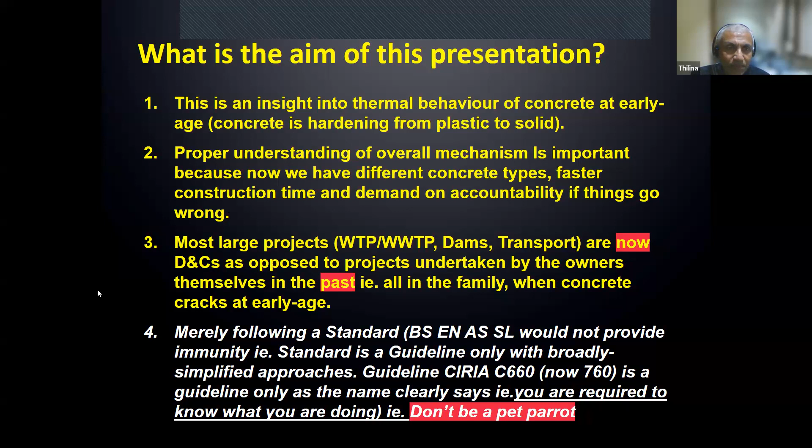My background very quickly: I did my PhD in structural engineering on temperature-induced stresses in concrete storage tanks, and of course on bridges. Then I was lucky to get an industrial fellowship from the Japanese Academy of Science to work in Hokkaido, the most northern island in Japan, very cold, working with contractors and consultants for 2 years.

Mainly the heat of hydration and seismic liquefaction. Then I worked on a few committees, AS3735 and New Zealand 3106. They're both water retaining structures codes, which take thermal effects very seriously compared with European standards, which just use a nominal reinforcement amount. And 3600, that's a concrete code, plus the Australian National Committee on Large Dams Concrete Dams Technical Committee, and the Japanese Concrete Society on heat of hydration, as part of rewriting design and construction specifications.

In my career, I have seen good and bad projects. One thing is, when people think heat of hydration, they think of 10-meter thick walls. Now, heat of hydration affects thin members as well. The bad one is, sometimes I still get nightmares witnessing a client or consultant writing a blank check for a contractor, where at current prices that would be about Australian dollar 1.5 billion, where some thin members had cracks going right through the thickness, and this is inaccessible over 120 years once we've built it.

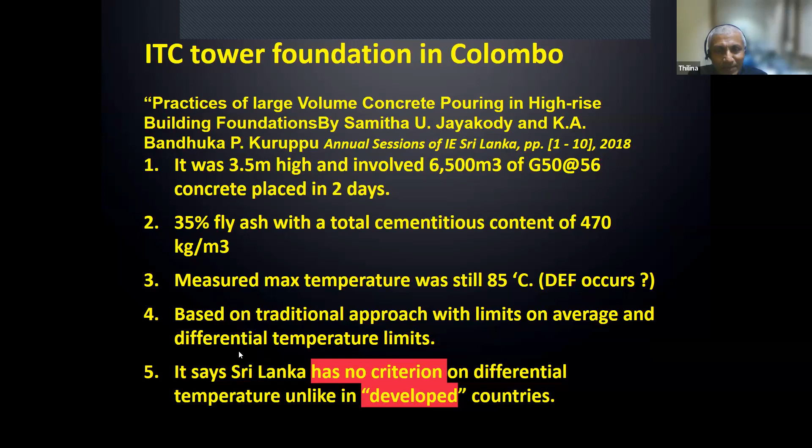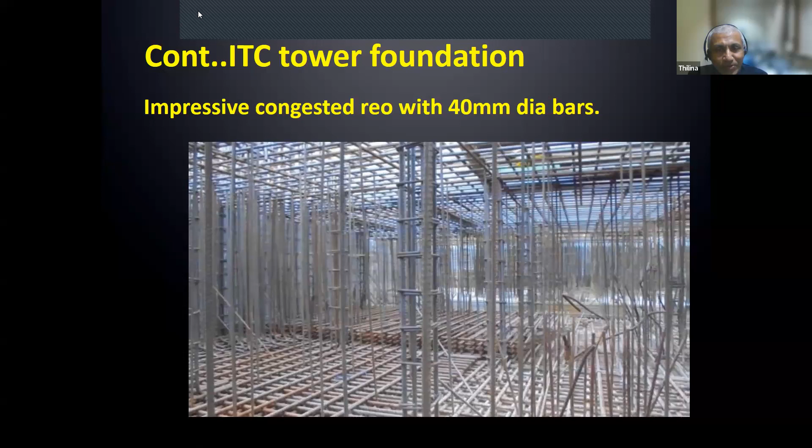Now, his reference to developed countries - I think developed countries get that wrong too. I have seen this both around the world and here. So no point doing things in Colombo saying, oh, developed countries have guidelines, so we do this, because developed countries get it wrong as well. That's what I'm getting at sometimes.

I have seen developed countries build a 400mm thick wall in a desal, probably costing 1.5 billion in today's value, due to wrong generic spec - maximum cement, 25 degrees, poor specs basically parroted from somebody else, inexperienced, probably never seen wet concrete, wrote the specs. The contractor poured that 400mm thick wall, designed to CIRIA C660. You can see the crack - I can basically put a ballpoint pen through it. So I just showed you developed countries won't get heat of hydration correct either.

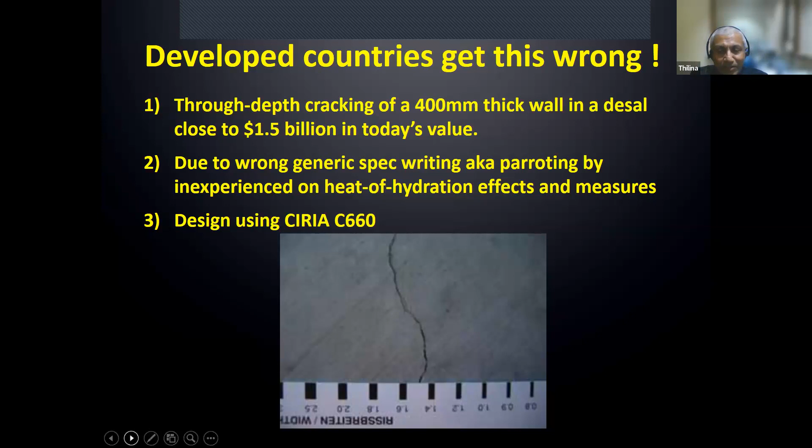Let's go to the next one, please.

So some argue, even with cracking, that cracking doesn't accelerate corrosion, so don't worry about the crack at 0.3 or 0.2mm. Let's put the desalination or bridge project aside - if you got a bathroom and got cracks you could see, you wouldn't accept that, you'd ask the builder to redo it. So why argue that on big projects we shouldn't worry about 0.2 or 0.3?

So I just don't rely on people trying to sell you snake oil saying don't worry about the crack width. If you write this spec, crack width at the 95th percentile should be less than 0.2 - that's what it should be.

After cracking, I have seen contractors whose specification for the crack repair is thicker than the design report, because they expect poor concrete to crack. They take truckloads of epoxy and start grouting. I have seen 550 pages of crack repair documentation, when the design itself was only over 30 pages.

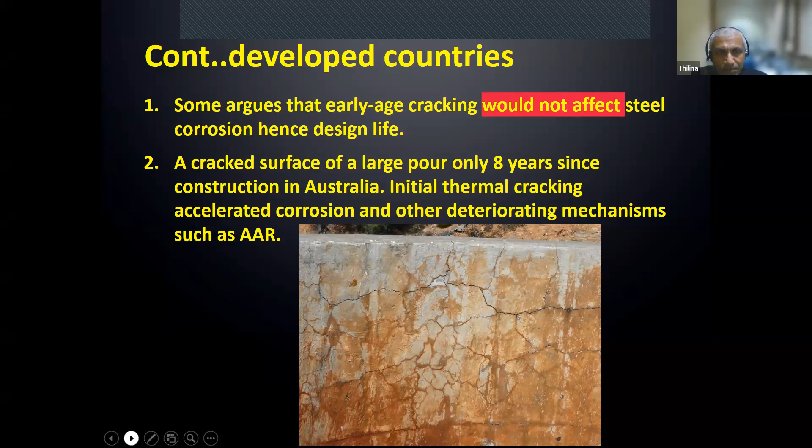Now, rather than jumping into heat of hydration, I'll show two types of thermal stresses. One is ambient, on hardened concrete - if you got a car park, it will get heated, that's due to solar radiation and ambient temperature. The second one is heat of hydration, which is related to thermal and durability issues very early on.

There are standards like American Concrete Institute Committee 217 - very good references, used by the US Army and USBR Bureau of Reclamation to build a lot of dams, so they have a lot of experience. Then there's the Japanese standard for RCC, with an English version - CIRIA C660. For ambient, you have two water retaining structure standards, 3735 and 3106, and ACI American Concrete Institute 318.

I suggest especially the Sri Lankan audience and others, if involved in water retaining structures, look at 3735 and 3106 - temperature effects are very comprehensive there. Next one, please.

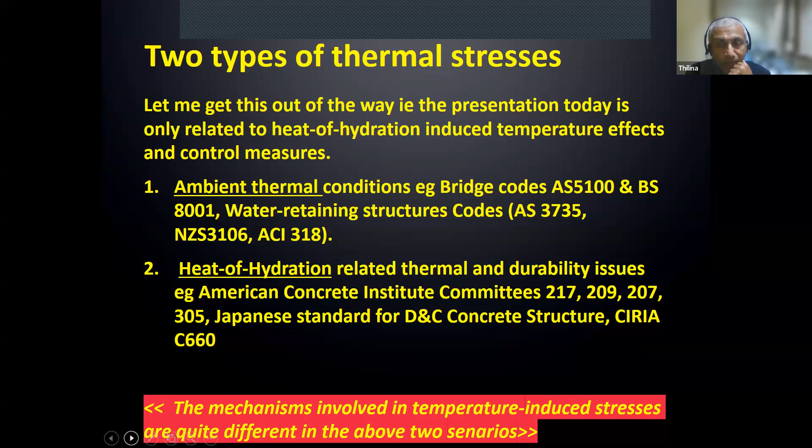Now, ambient thermal effects happen in hardened concrete. Of course wet concrete will be subject to ambient too, but formwork will mostly cover it. Over the years, if you take ambient temperature effects, they normally govern all the loading conditions - 30, 40 years ago, they were not in any standards.

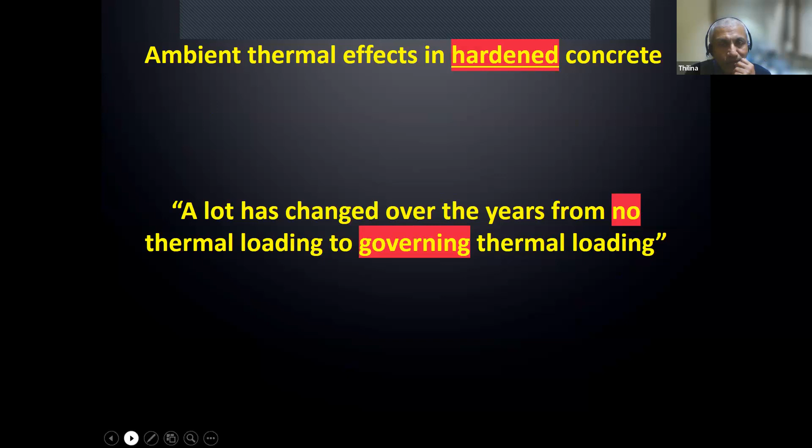This is how ambient temperature gradients, ambient condition induced temperature gradients, occur on bridge decks. If you look at 1969, it's uniform, but now it's a fifth order parabola. I did some work with the late Professor Nigel Priestley at University of Canterbury on this fifth order parabola - throughout the world they use the left one, now it's the parabola, done in New Zealand. So you can see it changes from uniform to fifth order parabola. Let's go to the next one, please.

From that diagram, 1969 uniform was 20 degrees - if it's a bridge deck, it expands uniformly, and if it's on bearing, it's stress-free, no stresses at all, because it's axially unrestrained. But post-1977, there's a fifth order nonlinear parabolic thermal gradient - this one, even if unrestrained, gives us primary or residual stresses.

And if it is restrained, we get secondary flexural stresses - you had heard sometime what I said, primary residual. Most engineers, when they use software - I won't name the brands - sometimes don't even know what residual stress is, but they run MIDAS and everything, sometimes with no clue. So the best thing is to get a pen and pencil and do hand calcs. I don't have time to put that slide today, but you have to be very careful when you get a nonlinear gradient. Next one, please.

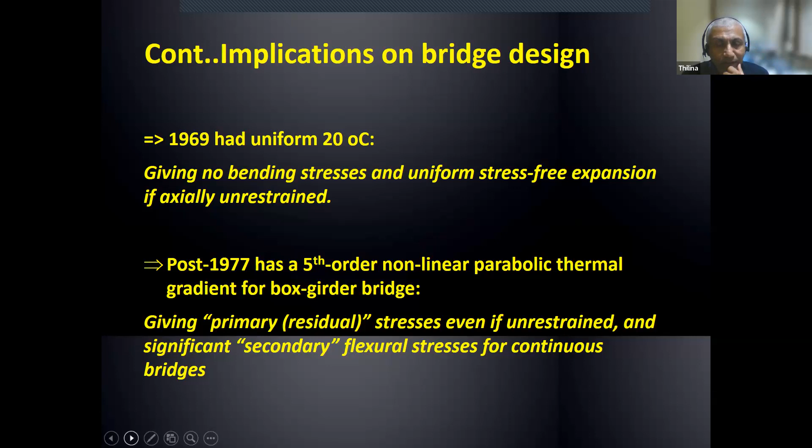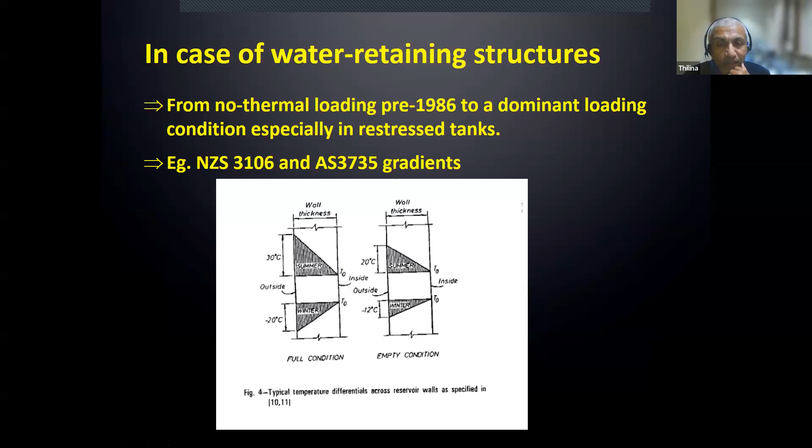So in case of water retaining structures under ambient conditions, pre-1986 codes didn't mention this at all. Now both Australian and New Zealand standards say if the tank is full under solar radiation, we get a 30 degree temperature rise externally, and if it is in winter, we get a 20 degree drop. Once you do the calculations, you can see this dominates the hydrostatic induced loadings.

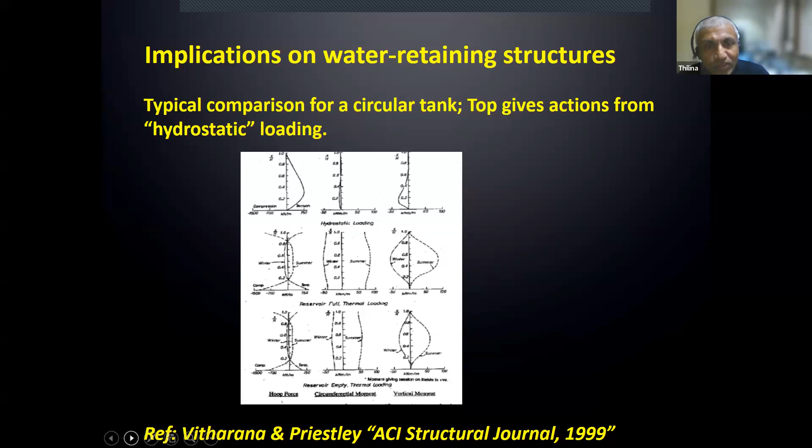I just put this as a quick example on the water tank. I published this paper in ACI Structural Journal in 1999. The top one is the hydrostatic loading, bending moment, hoop force, circumferential moment, and vertical moment. The middle one and the bottom are the thermal stresses. It's not time to read the numbers, but you can see the difference when it comes to circumferential effects - zero on the hydrostatic, but thermal effects dominate.

So that's some reason why a lot of tanks in Australia and New Zealand started cracking. That's the reason they looked at what happens post-cracking and found it is the thermal stresses.

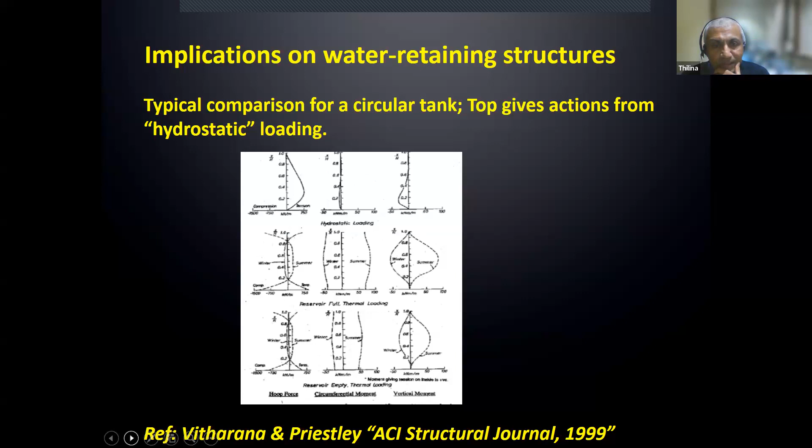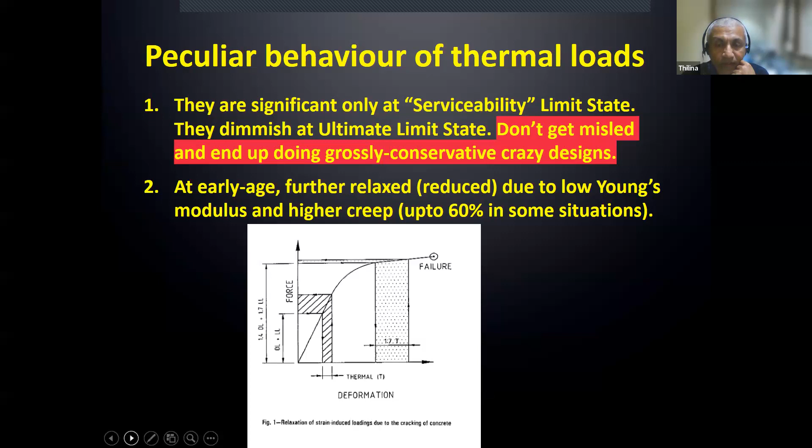And at early age, concrete, one other thing comes into picture - I'll put it in the slides later. Early age concrete creeps, it's a semi-solid, it creeps a lot. So if you calculate using elastic theory, when you include creep effects, the elastic calculated value will be reduced by up to 60%. That's one reason some people tend to overestimate heat of hydration effects.

Ambient versus hydration-induced thermal stresses. As I said earlier, under ambient conditions, temperature induced stresses occur under constant Young's modulus because concrete has already hardened. So when the sun goes down, they disappear.

But when it comes to early age, thermal stresses are generated under changing Young's modulus. So when it expands in the heating cycle, there's very low Young's modulus, so compressive stress is very low, but when it cools down it's under higher stress. So that's what gives us a net locked-in tensile stress. The two mechanisms are entirely different.

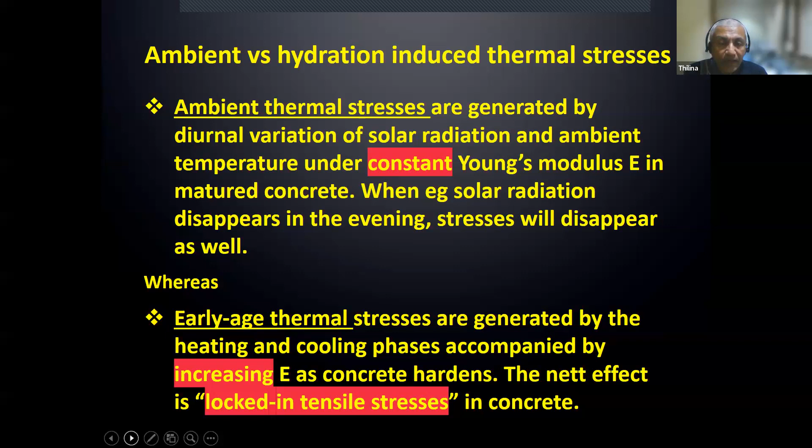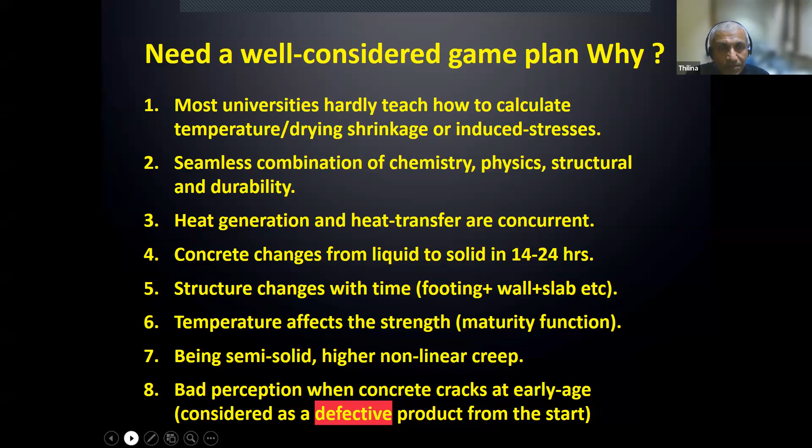Basic facts on hydration - most guys know this one. Hydration is exothermic, that's it - the reaction produces heat. That's what you can see on site. When you touch hydrating cement, it's hot. So it produces heat.

Hydration is thermally activated - it's like chemistry or physics, I can't remember. Some reactions are thermally activated, meaning the reaction occurs faster when the temperature is higher.

So that's why in a larger concrete pour, the inside is much hotter than the outside, and the inside hydrates faster than the outer zone. We need to keep that in mind because some people think everything is adiabatic.

Hydration characteristics are unique. You can't just take a concrete mix from England or Spain and apply that to Sri Lanka or anywhere else on the planet. Every factory is different - they come in different fineness, different aggregate properties. Everything is different.

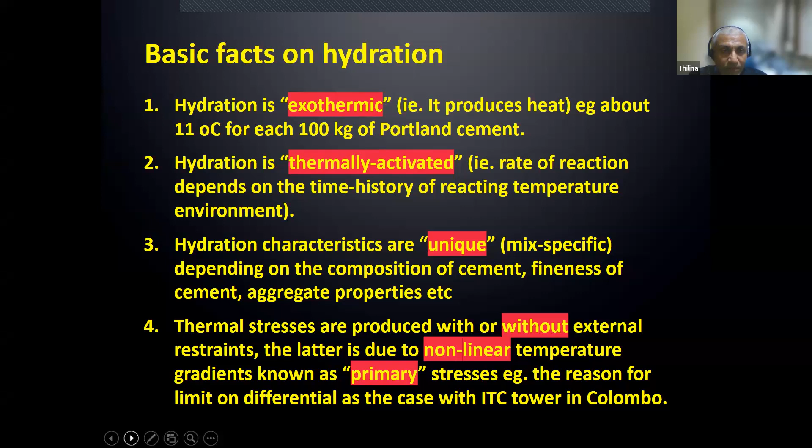Now, validity of temperature alone as a criteria. Most people still use specs saying 20 degrees maximum, 25 degrees maximum, but temperature is only one parameter. Concrete cracks when thermal stress exceeds the tensile strength, so temperature is only one criteria too.

If you look at basics, thermal stress is simply E alpha delta T. E is Young's modulus, alpha is the coefficient of thermal expansion, delta T is temperature change. So we only worry about delta T - we don't worry about alpha, and we don't worry about E either.

So with this, treating temperature alone as the cure for all ailments, like a panacea, can give problems. Therefore, temperature alone as a sole criteria has limited validity when it comes to serious projects. It may have had a place 3-4 decades ago when there were only 4 cement types throughout the world, but now everybody has different cement - it's like milk, where here I can buy about 32 types. Cement is like that too now.

As I said, 3 to 4 types - you can see the American Concrete Institute, civil engineers, always reference 3 to 4 types. Therefore in modern construction engineering, we have to be very careful using those 25 and 20 degree criteria, because even if they are exceeded, the concrete may not crack. But sometimes they have not been exceeded and it still cracks, because of uncertainty mainly from construction speediness as well as different cement types.

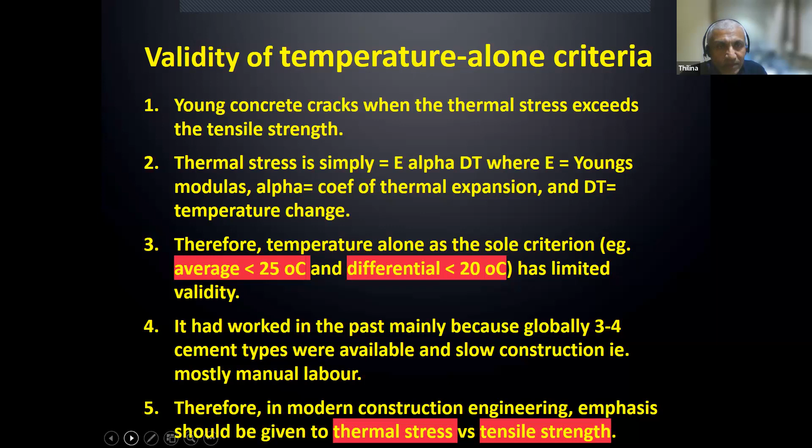Now, adiabatic versus non-adiabatic reaction. Adiabatic means no heat is lost or gained. So when some reaction happens, if it's adiabatic, all the sides are closed, shut down, so the heat produced by the reaction itself accelerates the reaction.

But when it comes to non-adiabatic, it's anything other than adiabatic. There could be isothermal, like in a thin member where ambient temperature is 15 degrees and hydration takes place at about that temperature environment. And number 4, semi-adiabatic, as I said, is a test that's now getting very popular.

The hot box trial: we make, I think, a 1 meter by 1 meter pour of concrete, put in thermocouples, and measure it. In Sri Lanka, I was involved in the Nalanda Dam project, and I think we wrote a paper in 2015. The irrigation department engineers, I just told them about hot box, and they did an excellent job. I think the engineer is now a regional manager in Anuradhapura.

So there are things you don't have to look for, like a calorimeter or an adiabatic calorimeter. And when I said isothermal, there's a hydrometer where cement reacts under constant ambient temperature. Even here, we used to have those at CSIR, or similar scientific organizations like most British Commonwealth countries have. They even don't have that equipment now.

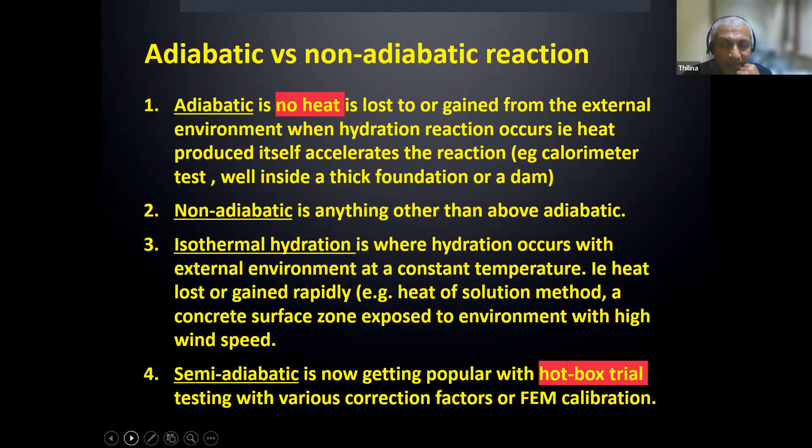So here we talk about fast construction. Most of the fundamental research organizations have disappeared from the planet. So next one, please.

So, steps in thermal stress calculation. These are the steps I'll go through on the next slides, I can't remember how many more. So number 1, hydration model. That's the first thing we had. What is it? Are we using the correct hydration model?

Then heat transfer: how do you do heat transfer modeling? Then assemble ambient data - ambient interaction is important, especially in hot weather and cold weather countries. Then thermal properties of concrete - if you Google, you get any number you want. Then its strength and stiffness gain in young concrete, and thermal stress calculation, comparing with tensile strength.

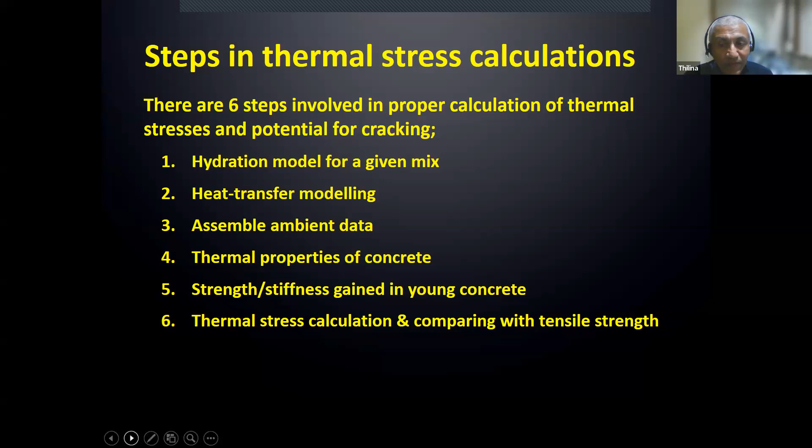So let's get in. Next one, please. Step 1, hydration modeling: how cement is going to produce heat.

Yeah, that's the first one. And most popular, traditionally adiabatic, as I said, is a test they do in the lab. No heat is allowed to be lost from the hydrating cement, and you measure the temperature rise. It's easy to use and has worked well, probably until recently, but now we find it's not doing the job it was supposed to do.

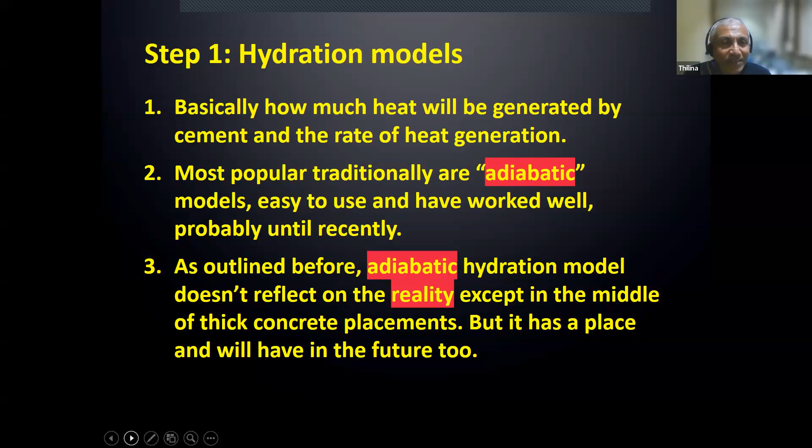As outlined before, the adiabatic hydration model does not reflect reality, except in the middle of a thick concrete placement, like a thick dam. Everybody doesn't build dams - I know Dr. Kamal is building some dams. He was supposed to send me some drawings for 3 weeks.

Next one, please. This is the adiabatic model. ACI 207, which I said is a very good document - I still have a hard copy here. It had been used for many dam projects in USA and around the world in the absence of project-specific mix trials. These are the 4 cement types: rapid hardening, slow hardening, sulfate resistant, and normal Portland cement.

So in this one, temperature produced by the heat generation itself accelerates the reaction, but it represents only what would happen in a thick dam or something like that, not in 2000 or 200 millimeter thick walls. So we had to be careful - I will show you later why it is not correct. Next one, please.

Now, Japanese Concrete Institute, again on the adiabatic, gives this formula. It's quite handy, and for different cement types you can get the parameters, but again, it's not for somebody to go and design - it's very good when someone is doing planning-type estimates.

And when we do heat of hydration modeling, we want to get the rate. The top one is total heat generated at a given time. As you can see, when time goes to infinity, Qt becomes Q infinity, that's ultimate. And if you're good with mathematics, you can differentiate it and get the rate, that is joules per cubic meter per second at a given time. So it's quite a good standard, what the Japanese got.

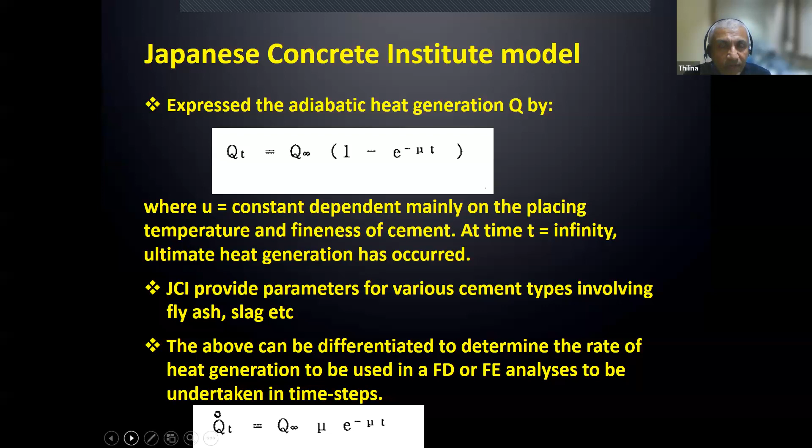Next one, please. Yeah, this is again Japanese - I got some values there and just produced this one a while ago. So we can get, for planning purpose or conceptual level, the effect of different cement types. And this again, so it gives on the x-axis time and the temperature in centigrade.

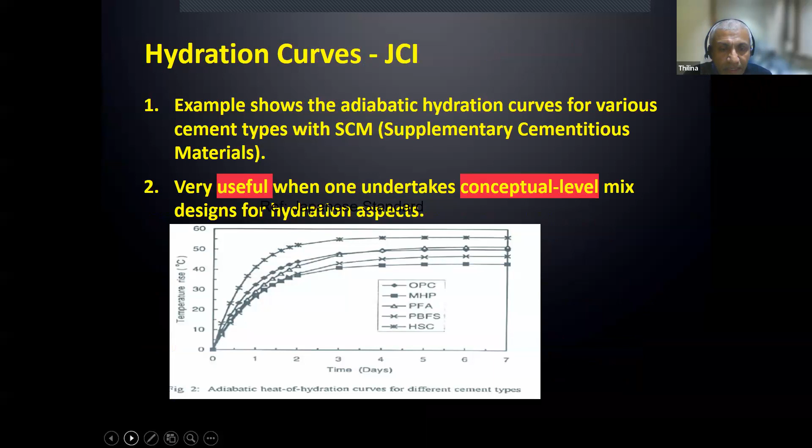Now, what I said about cement, you have to be very careful. If cement is too fine—normally Portland cement particles are 0.1 millimeter in diameter. But...

nowadays you get people selling what's called slag, SCM, supplementary cementitious materials. They say slag, blast furnace slag, fly ash produce low heat. You have to be very careful—if they've ground it too fine, it produces more heat than Portland cement.

So this is again Portland cement, this is from the American Concrete Institute. It shows the finer the cement, the reaction is faster, but ultimately the total cement heat produced is the same, because finer cement has a larger surface area for a given mass. So you have to be very careful when you use somebody else's model—from Syria or whatever—and do your projects in another part of the world, because each cement mill is different. They do different things.

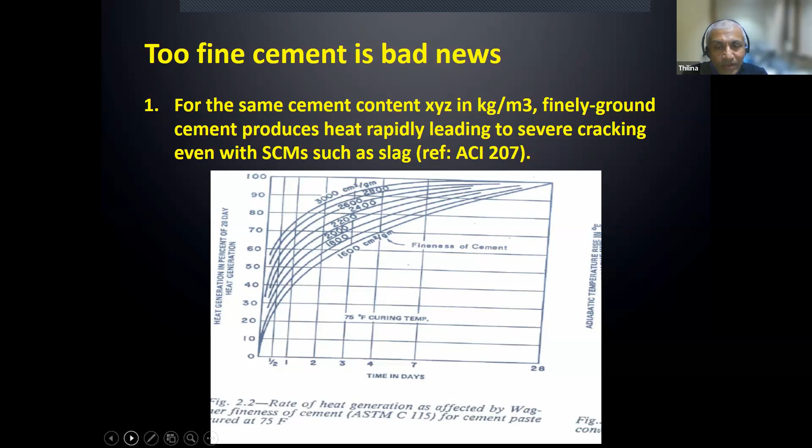And the highest placing temperature—as I said, shown in that curve—the higher the temperature, the more rapid the reaction. Because the higher the starting temperature, reaction takes place at elevated temperature, and hydration is thermally activated. So two things happen: in reality hydration is rapid, and also when you come to thermal stresses, if you place it at a higher temperature, say 30 degrees, and at night the resting temperature is say 20, on top of hydration you've got 30 minus 20, a 10 degree drop as well. So people think placing temperature is only for hydration—no, it affects ultimate stress as well. I'll show you that later.

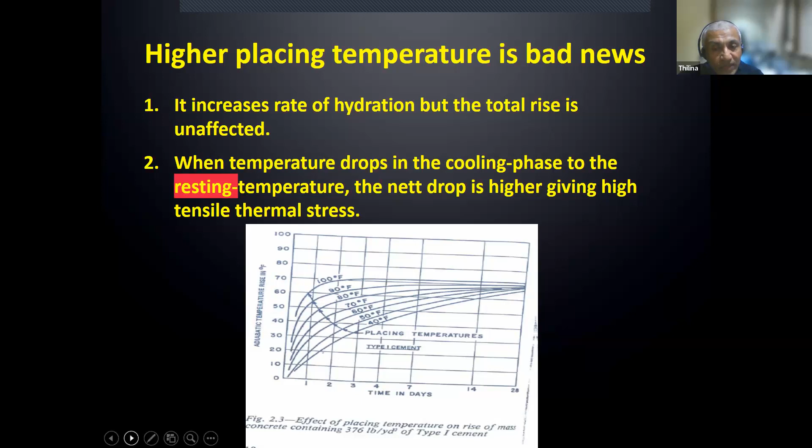So there have been models—Priestley and Thurstan, 1982, in New Zealand, started when they were pouring the Christchurch airport hangar, 5 meters thick. They developed that one. Then I happened to do similar work with Dr. Sakai in Sapporo. Our model is simple, but again we got the idea from a Danish chemistry scientist, Rastrup, in 1954—probably, you know, I was still in nappies at that time.

So we just used that and developed a model, and tested it in the lab as well as in practice. This model is a simple computer algorithm to incorporate into heat transfer modeling, but most software can't do it, so you have to do a little bit of juggling.

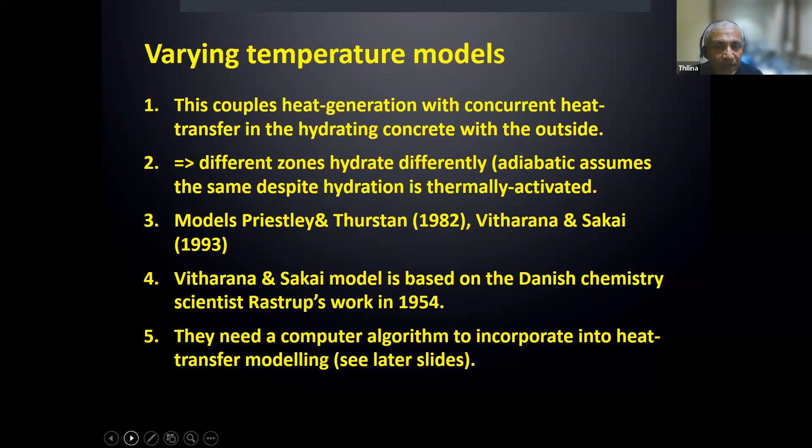Now I am prejudiced—from my model I always have a lot of ego. This was in a 1995 conference on concrete under severe conditions. This is cited in British Standards as well—I think CIRIA, whatever it is, C660. I recently saw some Canadians suggest that too. So basically, when you do heat transfer in whatever model, it calculates the heat temperature times heat series, time versus temperature in the concrete.

and incorporates that into the hydration model by calculating a TE—T is the equivalent time. So equivalent time at a higher standard temperature, say 2 hours, at elevated temperature could be equivalent to about 4 hours. That's how it is coupled. Rather than going into detail, this is how it's done—Rastrup in 1954 produced a similar chart, a similar thing for cement in Denmark.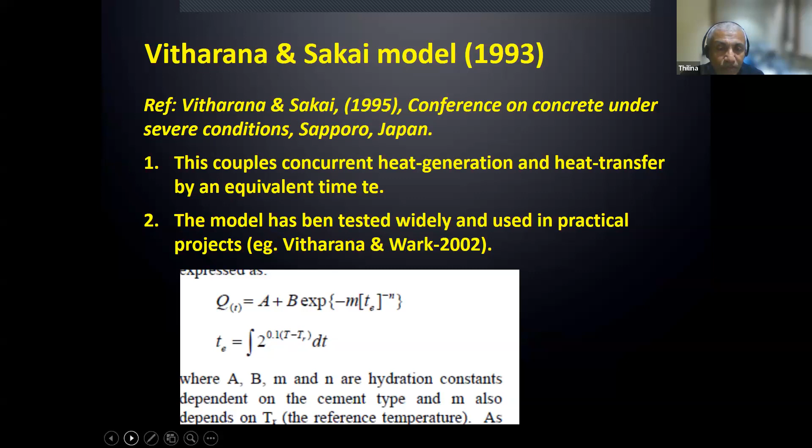So if we are using this, we probably need something like a coupled non-adiabatic model, which I mentioned earlier.

Step 2, heat transfer modeling. Now, there is software for this, but I just want to show what heat transfer involves. This figure I got from another consultancy I did recently on water tanks and ambient conditions, but I don't have resources to draw new ones for this presentation, so I took that. What is meant by interaction with the ambient?

Traditionally, it's ignored - they just consider temperature only. Sometimes solar radiation can affect the top surface of a raft foundation concrete. So during daytime, if you leave it open, sometimes it helps reduce your differential, because the solar heat will heat it up. Especially the other case is in cold weather.

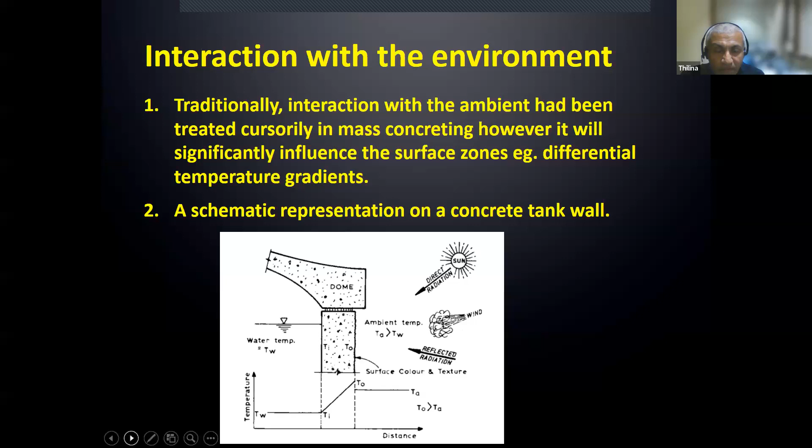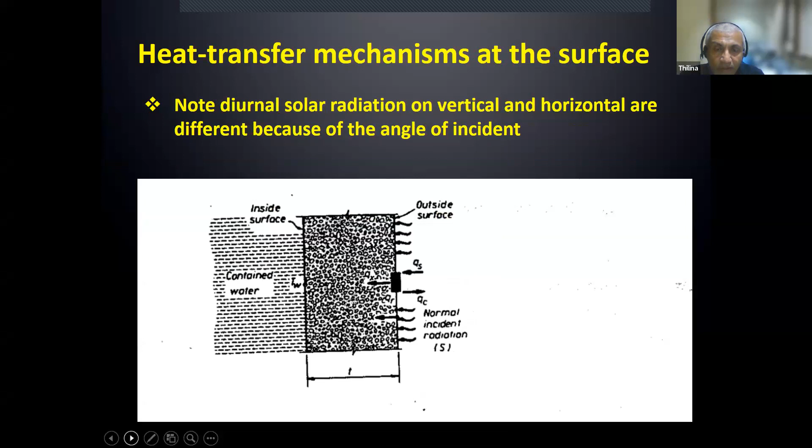This is just the heat transfer mechanism - don't worry about the water side. On the outside surface, we get solar radiation, and also temperature loss due to convection. If there's wind blowing past the wall, it takes away a lot of heat. Even under zero wind speed, there will be heat loss known as convective heat loss.

It's always going to be 1-dimensional. Some dams can be a little complicated, but still 95% of cases, in my experience, is just 1-dimensional heat transfer. Even if you look at box girder bridges, which I showed as a 5th order parabola, it shows 3-dimensional and 1-dimensional results are very similar. So why bother with 3-dimensional when you can do 1-dimensional in 2 hours?

We are talking 3 minutes, versus probably 2 weeks if you're lucky, for 3D. So in this equation, Q naught is the rate of heat of hydration, which I mentioned earlier. If there's no heat of hydration, just ambient conditions, only Q naught disappears. So that's very important - when you have a curve, you accurately differentiate it to get Q naught, which is in joules per cubic meter per second. Joules per second is watts. So this is the coupled heat generation term when we deal with early age temperature modeling.

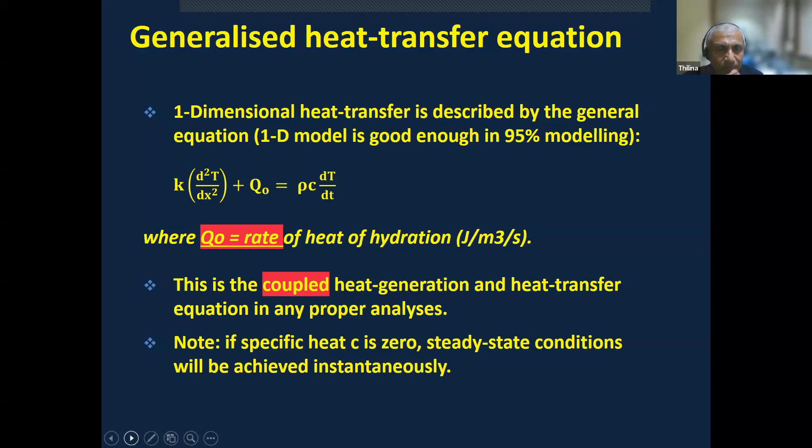This is my personal prejudice - I am a finite difference man. I did a lot of this work in my past consultancies. I do finite difference; finite element would be good, but those are normally software packages. Finite difference, I can do even on an Excel spreadsheet. So the thickness is divided into n layers, giving us n+1 nodes.

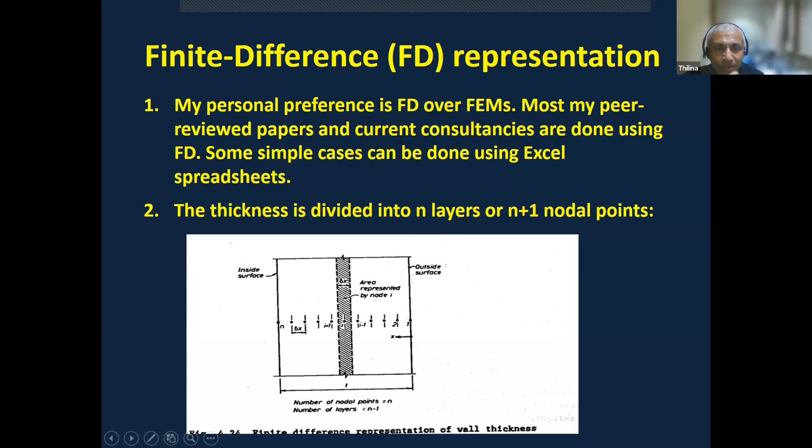So heat balance of the interior - most of you would know how to do this, it's very simple. Heat transfer coming from the left is in, going to the right is out; coming from the right is in, going to the left is out. The difference, plus the heat of hydration, gives the temperature rise. So it's a very, very simple equation. With finite difference, you can make it unconditionally stable - at any time step it stays stable, we call it implicit. Or it can be conditionally stable, something called explicit. Those are covered in some publications I did, and there's a guy called Cook who published in 1982.

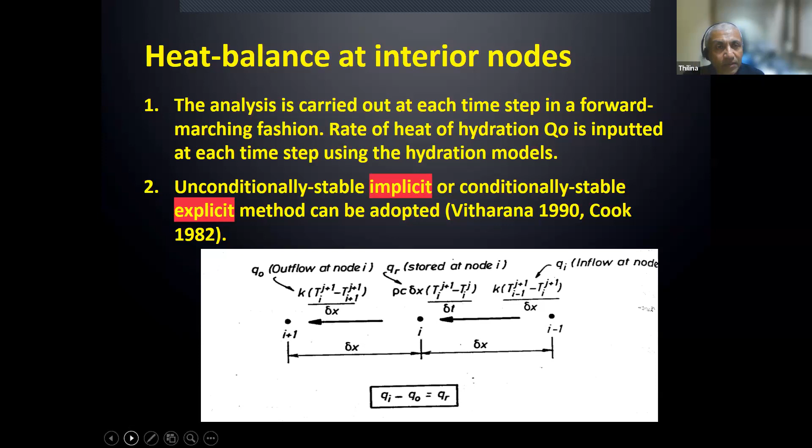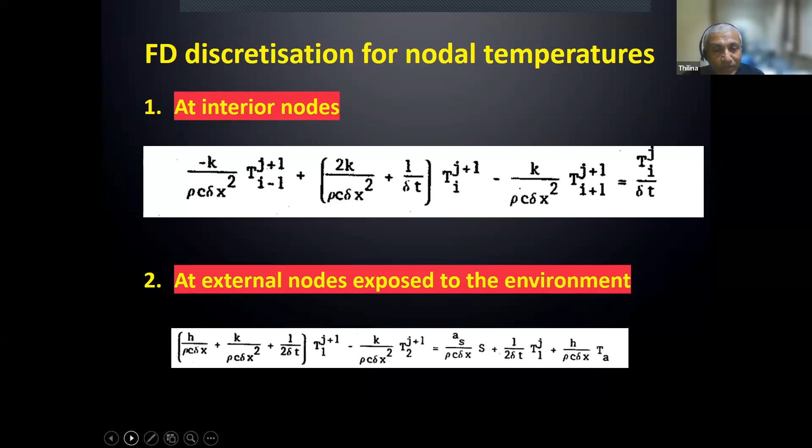So finite difference discretisation for nodal temperature at interior nodes. If you look at Ti-1, that's the I-1 node temperature at time step J+1. And exterior nodes involve interaction with the environment. That's how the equations come up.

Then you can assemble the overall temperature matrix. You write those equations, one external, one internal node, or two external and interior, and get n+1 equations. You solve it to get temperature at the end of each time step, and march forward. I did some of this on the Excel spreadsheet, but it's conditionally stable, so you have to select the right time step if you are using an explicit method in the computer program or Excel. My implicit one is in the MS-DOS program.

Step 3: assemble ambient data. I give you this one because a lot of Bureaus of Meteorology in most countries have either disappeared or don't do any work. They try to make money out of business, but they are not good business people either. So anyway, you can develop ambient data based on some of the simple parameters they give.

Relevant ambient data - we don't know ambient data in advance in most cases. Like in Sydney, I get weather 5 days in advance. Some countries you may not get, but still, if you've got a computer or even a calculation pad, you can update your temperature generation in the pour as you measure the ambient data. There should always be sensitivity analysis if you are in the design office - your temperature won't be exactly 30 degrees or 10 degrees.

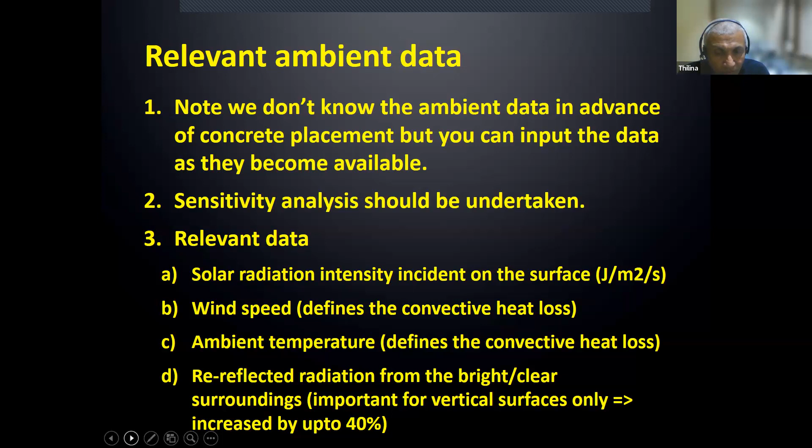Ambient temperature determines the convective heat loss. Lower the ambient temperature, faster the heat loss from the hydrating mass concrete - that's QC. HC is the surface heat transfer coefficient, TS is the surface concrete temperature you get from your program, and TA is ambient temperature. TA and H are the ones we need to input.

Most countries' weather forecasters now only give very few data points. They won't give hourly variation of temperature or solar radiation at all. I don't know about Sri Lanka, but here that's the case now.

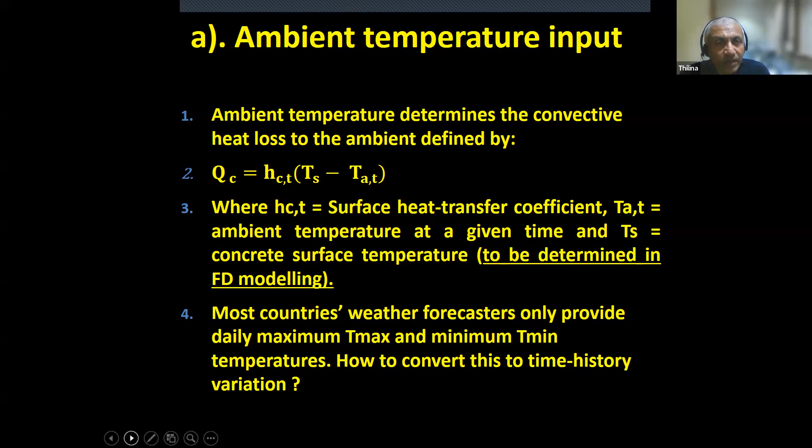This is the ambient daily temperature prediction, showing how it varies with time for the hottest date in Sydney. I did this in 2022 based on T max, maximum temperature, and T min given by the Bureau of Meteorology. There are two models - that's how they look. I didn't put in the measured data because I didn't get client's permission, but they are reasonably accurate. You don't have to be very accurate, but reasonably accurate.

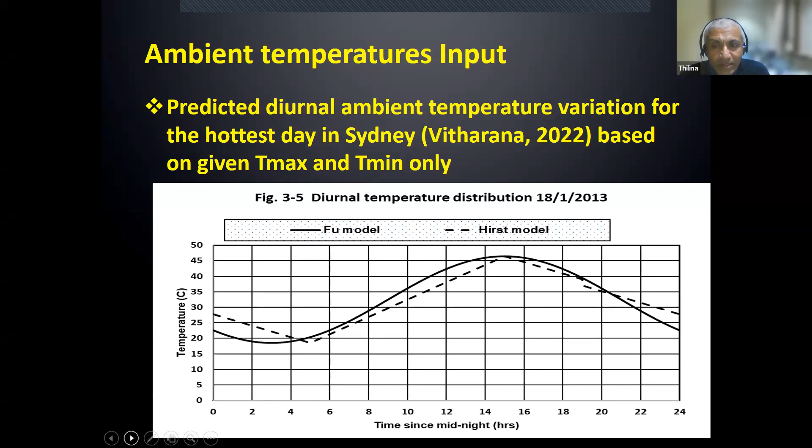Then wind speed - as I said, the faster the wind going past your wall, the more heat it takes. Billington in 1965 produced this chart. You can see even at wind speed 0, there is heat loss with Hc equal to 10. At wind speed about 16 meters per second, there's a lot of heat loss from the hydrating surface.

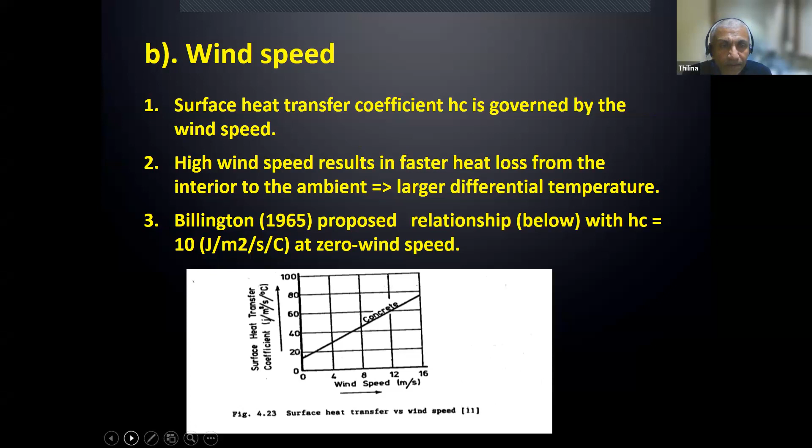Solar radiation - again, the Bureau of Meteorology now doesn't give hourly solar radiation, but some solar panel suppliers will, using the same formula which I developed about 2 years ago. They only give the total solar radiation for the whole day, not hourly, normally in megajoules per meter square. In Australia, we can get it free from the internet from the Bureau of Meteorology.

When solar radiation is incident on the surface, what is absorbed into the hydrating body is A times S, where A is the surface absorptivity coefficient and S is the solar radiation. A depends on the color - I'll give some typical numbers later.

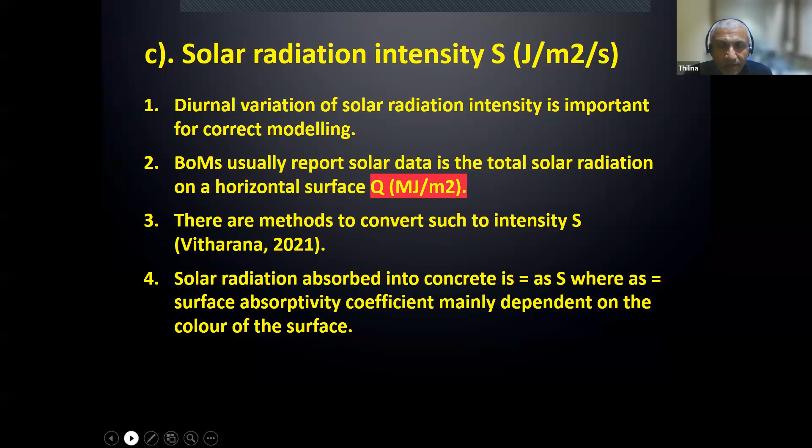This is for 3rd January 2002, the maximum Sydney total solar radiation day. If you're running a solar panel, you make money that day - 35.4 megajoules per meter square. That day shows how the solar radiation was incident on walls as well as the horizontal surface.

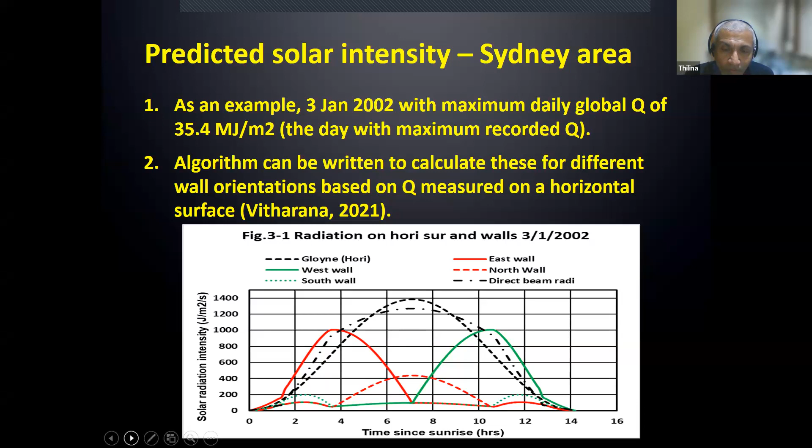I developed a solar algorithm in 2021. You can see two sort of knobs on the two sides - those are east and west facing walls, and the one in the middle is the horizontal surface. The horizontal bridge deck gets more heat, both in volume and intensity, compared to east and west walls. North and south don't get much. Here in Sydney, the north side wall gets more solar radiation in the winter.

Then surface absorptivity coefficient, this is how much solar radiation incident will be absorbed. If 0.35 white surface, 0.65 gray, and 0.9 black surfaces. So concrete is normally starting with 0.65 gray. After some time it's 0.9. So 0.8 is a good number.

Step 5 is strength and stiffness in young concrete. This is very important when we do thermal stress calculation and compare potential for cracking rather than just temperature only.

Tensile strength is developing with time as well in young concrete, so is the compressive strength and stiffness, E, Young's modulus. So if you got a temperature delta T, E is very important. That's what calculates the stress. E alpha delta T, I think high school or grade 5 lesson.

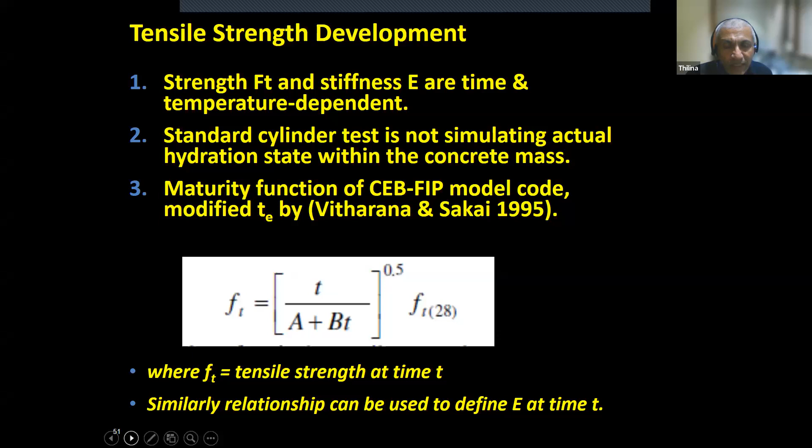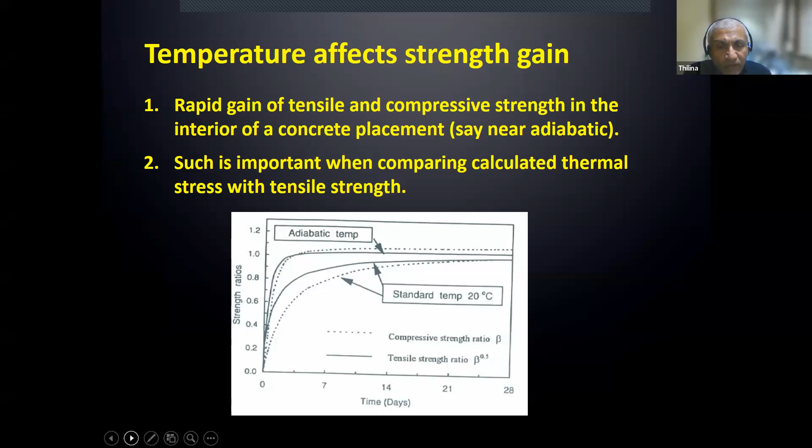So you can see the bottom two lines are standard temperature compressive and tensile strength. The top two are in the middle of hydrating body, strength as well as compressive strength as well as tensile strength gain is very faster. So it's very important when we do thermal stress calculation and compare with the strength. We look at the hydrating environment of the strength and the strength gain.

Creep of early age concrete. As I said, creep at early age can reduce thermal stress by up to 50 to 60%. So what is creep for a structural engineer? Creep is if you apply a load, there's elastic deformation, then in course of time it deforms further. One thing to note is creep is highly dependent on the time at which you load the member. Earlier loading, like 1 day, creep can increase the deformation by a factor of 2.

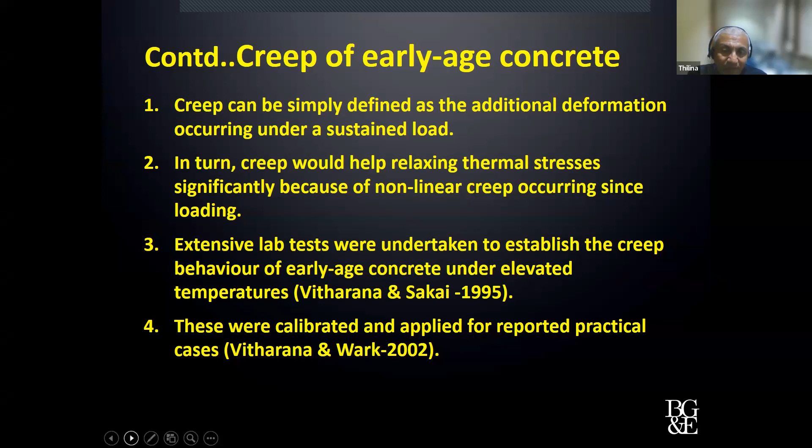So there are a lot of models for early age creep, but we also did one in 1995. It takes both the temperature and the time into account at early age, because at early age creep should be high since it's still hardening, like a paste.

This example, the bottom one is standard creep test done under 20 degrees and 80% humidity. Top one is same concrete mix at varying temperature up to 60 degrees. The creep factor is about 1.6, basically increased by about 160%.

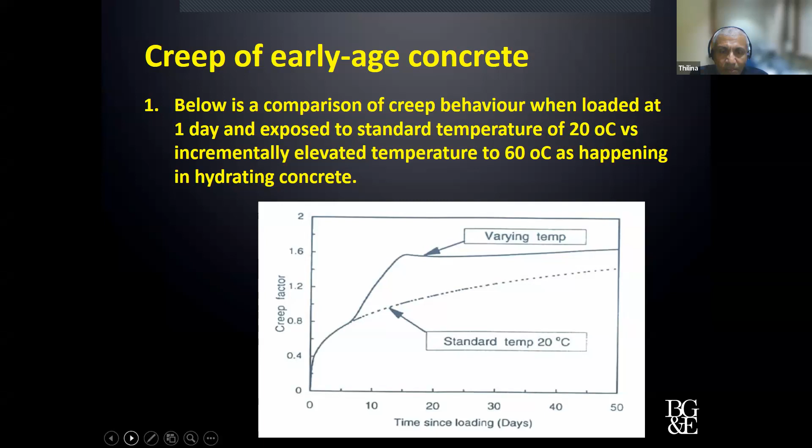Step 6, thermal stress calculation.

Engineers, I think, avoid thermal stress calculations. As I see it, they leave the temperature part to a materials engineer. Materials engineer, again, not to discredit them, they have no idea what the stress is. So what you get is they develop the mix design, you pour it and it cracks. Then it should be an engineer's job, or both sit together and work it through. It's a difficult calculation. Modern engineers start Googling, but Googling won't take you anywhere, and even if you get the answer, it could be the worst answer in the world. It's like Googling symptoms for an ailment on the web - probably I should not be alive here. Anyway, most of us do, if you belong in the Google generation.

Engineers use guidelines as religious text - CIRIA C760, we use British Standard, we use that one. We know better than anybody else, but it's nothing. You have to use your own knowledge and training. If people don't know adiabatic hydration versus other hydration, what's the point of using any of the models? Universities don't teach them at all because they know if an engineer goes to practice without knowing how to design a beam, they won't get a job. So they only teach you how to design a beam against applied load - most universities, though there may be a few exceptions. And somebody told us 3 to 4 decades ago, control maximum, average and differential temperature, you'll be off the hook. But remember, not in today's D&Cs - you are not off the hook. You got the hook in the mouth, sir, somebody needs to tighten it.

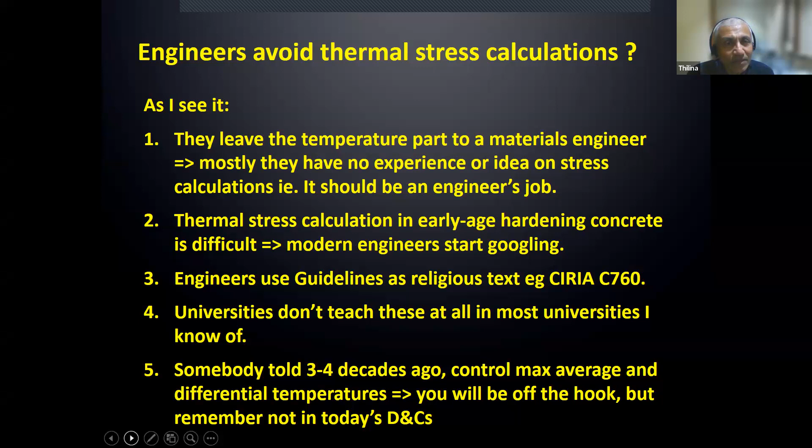So, stress calculation - I just put this one. As I said, simple beam column example, like a raft foundation - you can say it's basically a wider beam, and it's bending in that direction. So on the left is the typical temperature gradient, nonlinear, and then we have uniform and differential. The last one is residual. I think even at ITC Tower in Colombo, they tried to minimize that differential a little bit, because that gives residual stress, and that's what causes a lot of surface cracking.

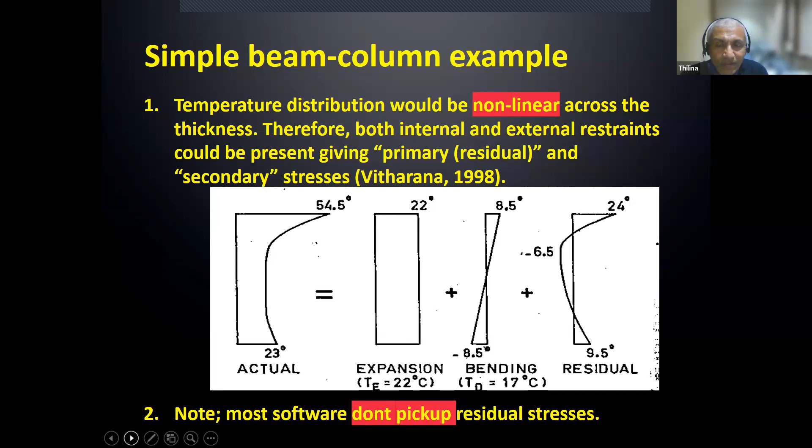So incremental thermal stress, again, a little bit of maths involved. For a given temperature gradient, including creep, you can calculate stresses from this formula - you can see the maths in that 1998 paper. RF is the external axial restraint, RM is the external flexural restraint. If RM and RF are 1, it is fully restrained, and you get that equation delta sigma equals E alpha delta T. If RF and RM are 0, it becomes equal to the residual stresses I talked about, which most software and engineers forget about. Then once we calculate the incremental temperature stress at a given time increment, we do the cumulative calculation at the bottom to get the total stress generated at any given time. That's simply what thermal stress calculation is.

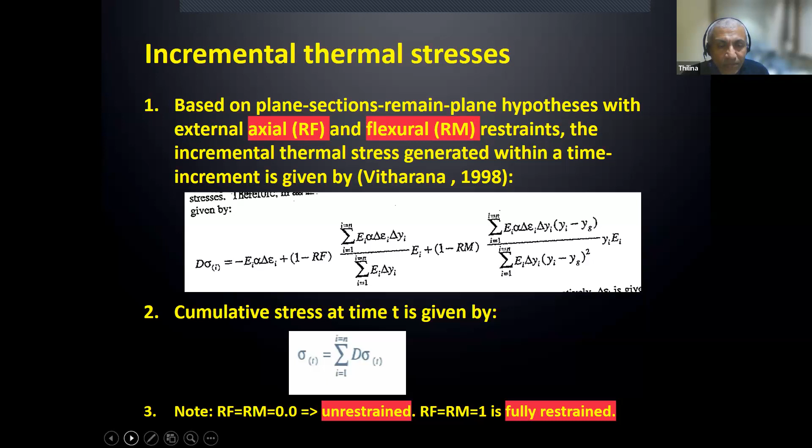Risk-based thermal crack control - the Japanese spend money on research, and they like concrete too. So what they did was a very smart idea. There's always uncertainty involved, so they said, if you do concrete work, come up with a risk-based thermal cracking potential. We calculate thermal stresses using the process I gave you, then tensile strength gain and maturity, calculate that ratio, and then depending on the importance of your structure, make sure your cracking potential remains within those numbers. So TCI, thermal stress over tensile strength, should be less than 0.6 if cracking is to be prevented. You have to be very careful - concrete cracks, but it's calculated and prevented. This approach makes sense because we're dealing with uncertainties, and for important projects, there's no guarantee it won't crack - it will crack. It's only a potential, that's what I mean by risk-based.

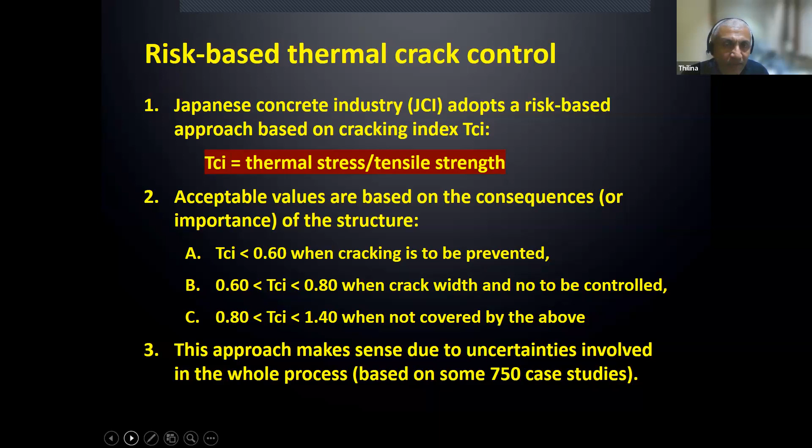Yeah, I was partly involved with developing this. This is a curve we get, so what you do is plot thermal stress versus tensile strength on the x-axis, then look at the probability of cracking. This has been developed from actual measurements over 750 sites, so it's quite handy for risk-based analysis. Even 3 decades ago in Japan, owners needed this curve developed as part of their concreting QA and QC plan.

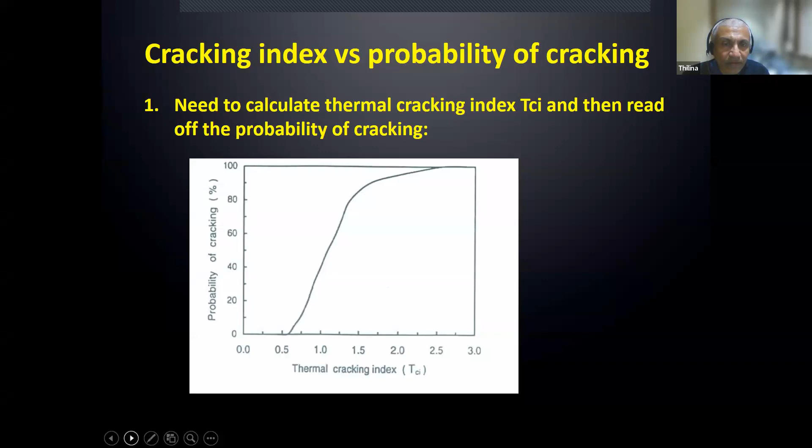Some practical applications, just to highlight a few things. I've got about 6, very quickly. Case 1, error with adiabatic. This sample we measured isothermal as well as adiabatic. You can see the 2 different curves - the blue one hydrates faster, and the orange one is slow. The orange one represents a concrete zone near the exterior, exposed to ambient conditions. The blue one is the inside. So using adiabatic for all hydration modeling is incorrect. It has a place, but don't try to split hairs with fancy finite element modeling for sensitive structures using such crude models.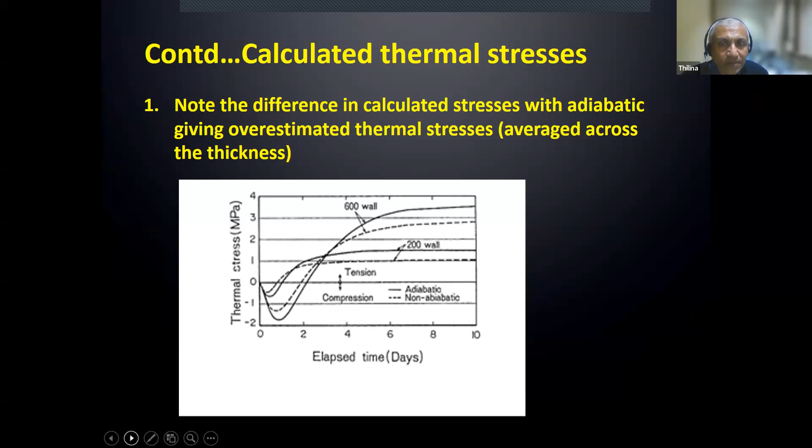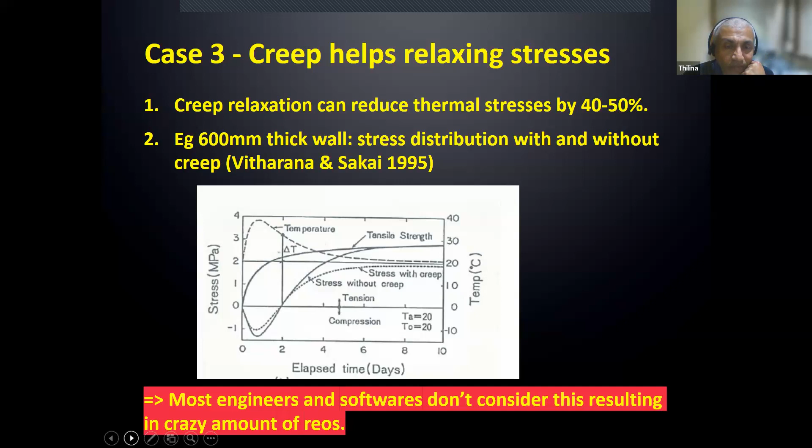Case 3, creep helps relaxing stresses. As I said, anybody not using the benefit of creep relaxation can come up with crazy designs when it comes to reinforcement. In this case, 600 millimeter wall stress distribution - with the same temperature development, calculated strength and stresses are much higher in the bold line compared with the dotted lines. So when you put these temperature gradients into structural programs and calculate stresses, you get very crazy numbers, and then you start adding reinforcement too. Some reinforcement designs are so heavy, you wonder why, when we had uncracked concrete 30-40 years ago without any reinforcement sometimes.

Thermal stresses versus tensile strength - this was done for Canning Dam in Western Australia. It's a gravity dam that had alkali aggregate reaction, and we put, I did a presentation about 6 months ago on this, 91 strand cables drilled through the dam and 130 meters into the foundation. Each cable had 91 strands, and each cable carried 2,250 tons - I think that's the weight of a US largest aircraft carrier. There we couldn't take any chances on the anchor block, because if it cracks, there's no guarantee the anchorage would be okay. So we did a very, very comprehensive model.

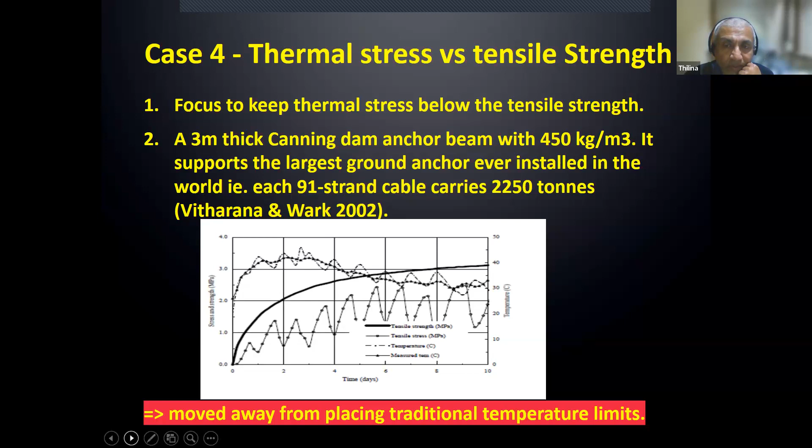The top graph shows - the darker line is the tensile strength, and the bottom wavy line is the thermal stresses near the surface. In this case, daytime temperature hit 35, and at night 15 degrees. So what we did is in the evening, we put plywood to keep the differential temperature down. In this case, all the thermal stresses are below the tensile strength, so it never cracked, and we were very happy. Otherwise, we'd need a lot more reinforcement - we already had reinforcement, but the chances of cracking should be limited even with reinforcement, because of the nature of the beast. If one of our anchors gave way, that would break the dam in half.

Buttressing of concrete dams - for example, those in Sri Lanka. They probably buttressed the Nalanda Dam around 2012. That dam is unstable according to modern factor of safety standards.

So they went and put concrete behind it. Why I mention that is you have to be very careful when you buttress a dam. I wrote a couple of papers, and I'm currently involved with probably the largest buttressing dam project in Australia, with 8,000 cubic meters of structural grade 40 concrete, making a buttress on the dam supplying water to Sydney.

So it's a big job, and you can't take it lightly. The thing is, you put the buttress to strengthen the dam, but then you can't crack the existing dam and say 'oh sorry, I cracked your dam.' This happens when the buttress cools down and puts tensile stresses into the existing dam. So we need to make sure the existing dam's risk profile is not compromised due to any construction. That's the law in most states in Australia when it comes to dam engineering - you can never compromise the existing risk profile. So basically, you can't crack the dam when you come to fix it.

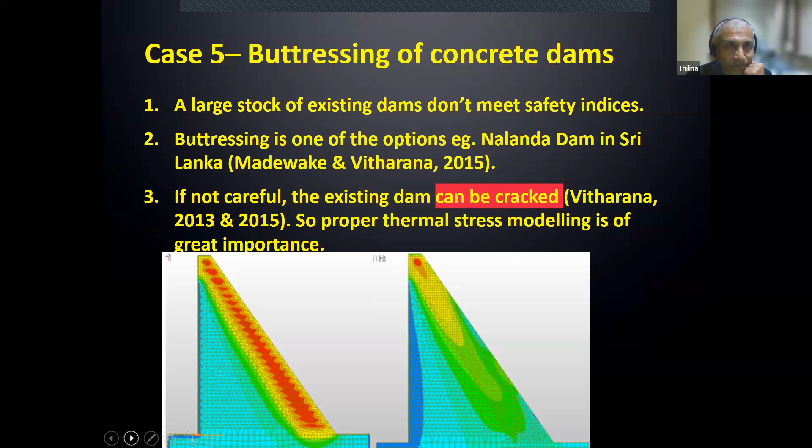On that project, we had to make sure that thermal stresses are well below the tensile strength. This is a typical graph showing the dotted line as thermal stress, and the bold line as tensile strength. In this case, we had to further cool down the concrete and alter the mix because we thought it was getting too close, based on the Japanese risk basis.

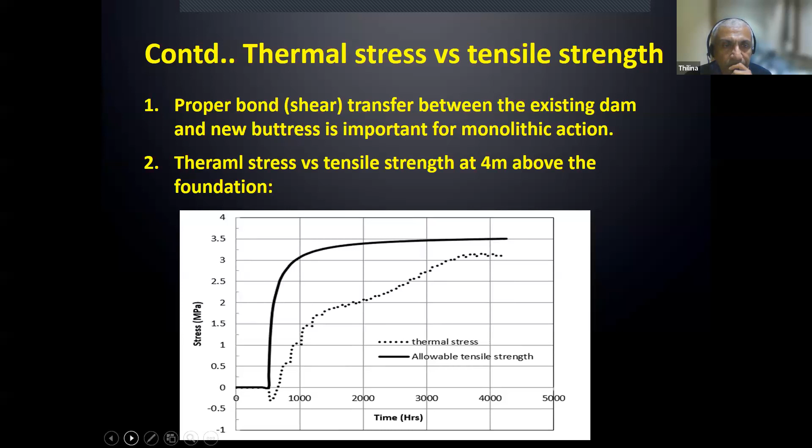Multi-layer concreting is a myth. I think for ITC Tower too, they said they were pouring concrete in multiple layers - probably that's the wrong thing to do. There's a belief that layering is a good idea to keep the temperature low in thick rafts. That's what people have told them, or they're just parroting it.

The same has been done in the ITC Foundation in Colombo too. I think they poured concrete in 1 meter thick layers with a gap between each layer because they wanted to keep the temperature rise down. What engineers forget is that it still goes back - the thermal stress is created by internal and external restraints. In multi-layer concrete placement, the hardened bottom layers restrain the new layer. So that's what we don't want, but we create it unknowingly because we want to keep the temperature low.

So in the next 3 slides, I will show you some calculations I did as part of an anchorage block of a cable-stayed bridge, up to 5 meters thick. Just to show this - this is the last slide. Don't go off on a tangent of temperature control when you come to serious projects. It worked in the past because it was the same mix - now things are different, and you can put any amount of rebar, but rebar is not the solution.

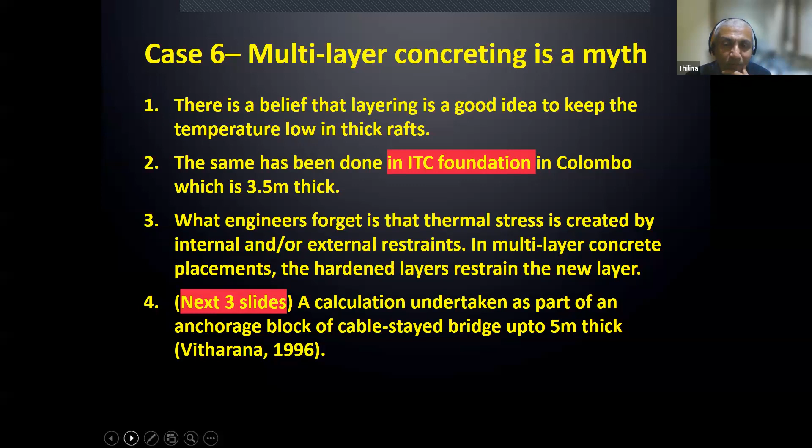So this one, layers of 1 meter thick - this is a simulation I did with 1-dimensional heat transfer and thermal stress calculations. We compared layering versus a continuous pour. Of course, a continuous pour takes time - you can't place it all at once - but we don't leave a gap between each layer.

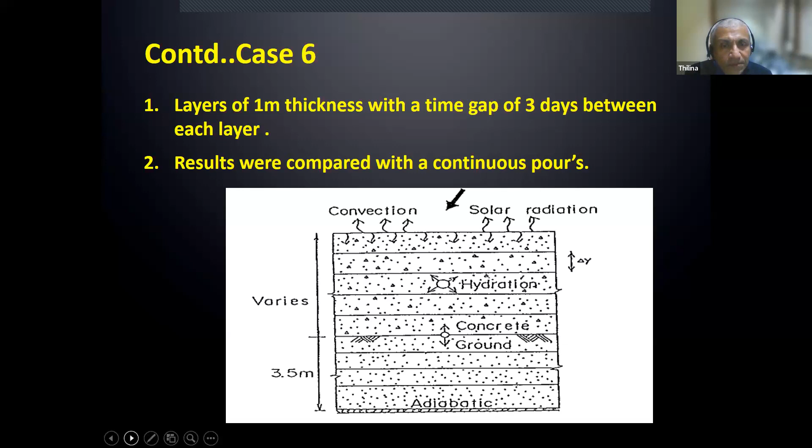This has been tested - I saw it recently in a German journal as well, though probably they copied my stuff but never acknowledged it. But you don't need my stuff - you just need to look at when it's a restraint. So multi-layering creates the worst case scenario for thermal stresses, which is ultimately responsible for cracking.

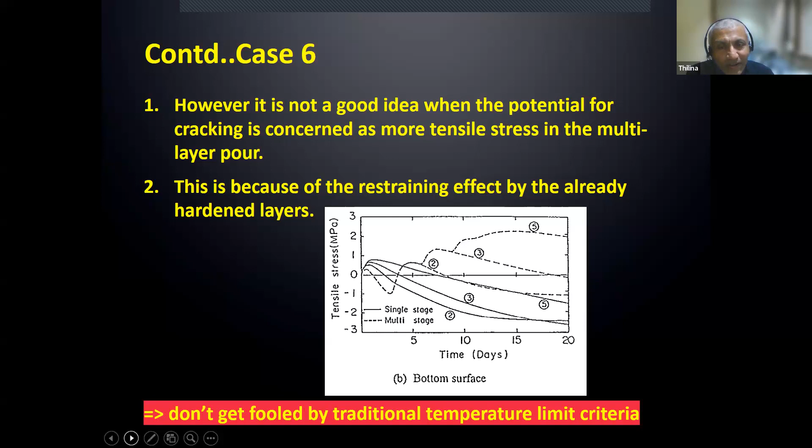Yeah, next one, please.

Thermal crack control measures. Let's look at it. Just a couple of them. Next one please. So typically, the most obvious one is placing temperature.

Of course, when you order cement, don't say 'minimum 300 kilograms per cubic meter of concrete.' Contractors are smart - if you say minimum, they give you 2 extra bags, because they don't want to take a chance. If it cracks, they say, engineer, you said minimum, you didn't say maximum, so I gave you two bags. Bad luck, it cracked - that's your fault. So keep the minimum cement content as low as you actually need.

Also, don't trust your fly ash or silica fume - as I said, they sometimes produce more heat than ordinary Portland cement. In Western Australia about 20 years ago, a marine cement with 80% slag was used. Some clients poured the concrete and it cracked the next day, when they never had a single problem with ordinary Portland cement. I've worked for the Western Australia Water Corporation for 20-30 years. Sometimes it cracks because they grind it very fine at the mill. So fly ash and slag can produce more heat than ordinary Portland cement.

I'm pretty sure in Sri Lanka too they have fly ash. And again, in that ITC tower project, I don't think fly ash worked. As I said, if I were you, I'd buy beer and drink it - you get 5 cents back from the can. So don't trust what's written on the cement bag, or the rep coming in a nice suit and tie telling you it's sustainable and all that.

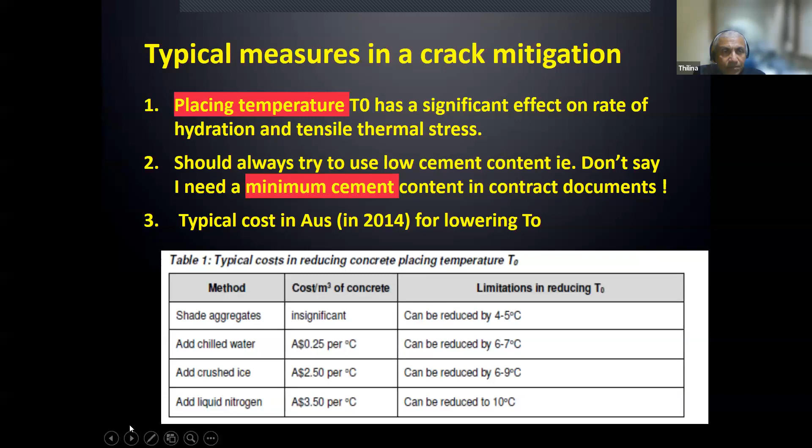Summary of my presentation: it's time to look beyond merely determining temperatures and maintaining them below maximum and differential values. Because what was said 4 to 5 decades ago - things have changed: faster construction, different litigation, and different cement types. And now we're asking for 120-year design life, so we probably need more cement to get the permeability and diffusion coefficient low. It all needs to be part of one game plan.

And always, where possible, please do hydration modeling. Proper modeling has no place for adiabatic models anymore. They work, or probably will work, but you have no way to explain it when things go wrong.

One method getting popular is the hotbox - there's a French standard for that. I know of only one project in the Philippines that used a French hotbox, and there are also some correction factors. I think a chap in Hong Kong, at the Public Works Department, developed quite handy ones - we're using them for some dam projects here. So with a hotbox, you can determine adiabatic and non-adiabatic isothermal behavior using those correction factors. Otherwise, you can use a finite element model to calibrate it.

Don't be a slave to guidelines. Standards - whether CIRIA C760, BS, EN, or whatever - the client engages you, the engineer, not the guideline. A guideline was developed somewhere probably thousands of kilometers away. They engage engineers, not a guideline - if a guideline were enough, they could use a fifth grade student to just repeat it.

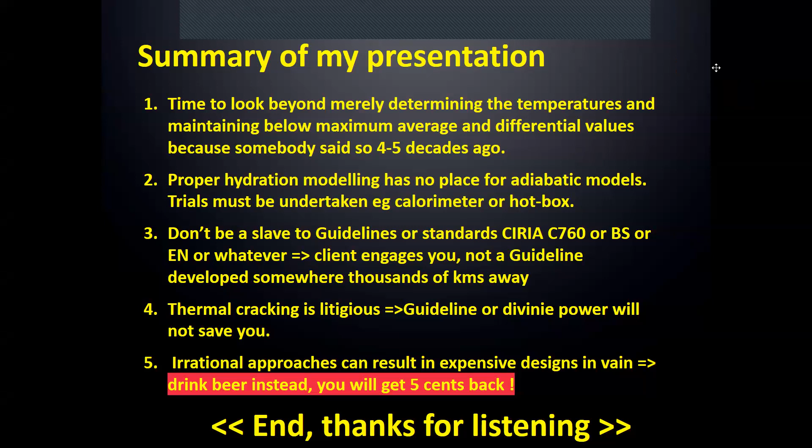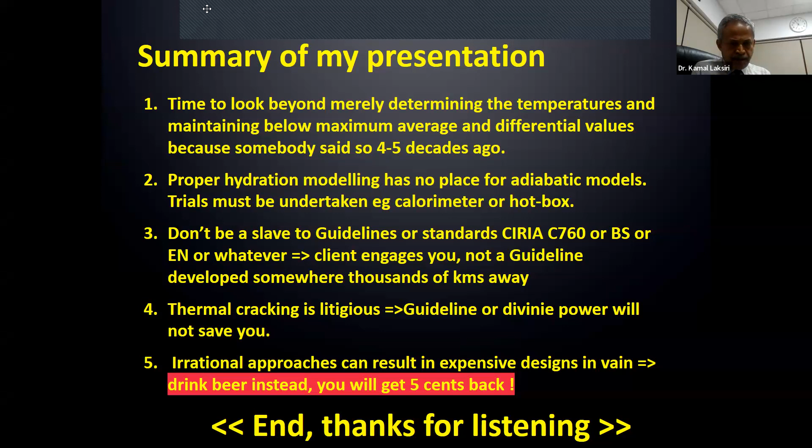Thank you, Engineer. Thank you, Nihal. Okay, thanks. Come up. Okay, thanks. Thanks, okay, Bhanuka. Okay, thanks. Yeah, okay, it will, take care. Bye. Thank you, Dr. Kamal Laksiri, for your presence. Thank you. See you later. Thanks. Thanks. Okay, bye. Good night. Bye.